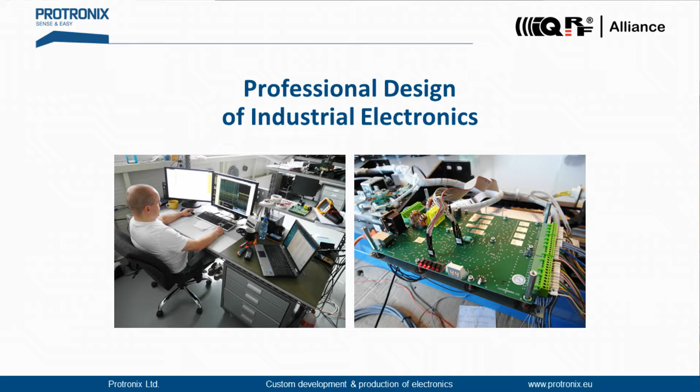So basically our attitude to the customers is that we start from some technical specification, and then through design of the product, through testing and certifications, and in the end, of course, everybody is expecting a successful product. This is our attitude regarding the design. These are just some pictures of design, and this is our EMC laboratory for electromagnetic testing. We are able to test our products or custom-made products in our laboratory.

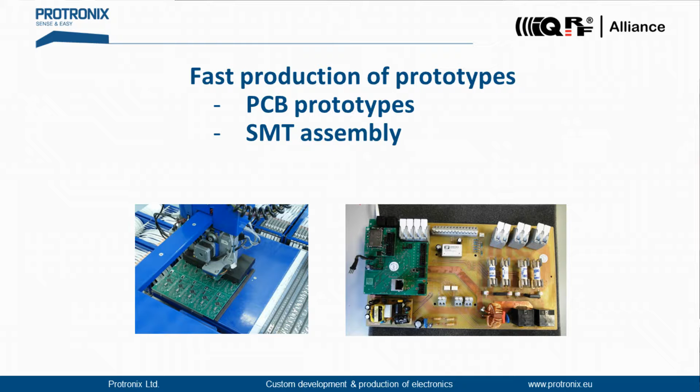And as I have already mentioned, I would like to pay more attention to indoor air quality problems. We're producing different types of sensors. It's CO2 sensors, volatile organic compound sensors. I will explain a little bit in more detail. Then we added to our portfolio ambient light sensors and differential pressure sensors.

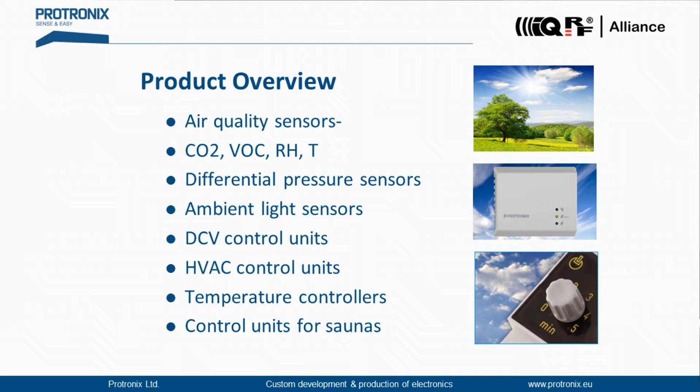So why indoor air quality sensing at all? Because on average we inhale about 15 kilograms of air per day. I think it's a lot. And almost 80% of time we spend indoors on average. When I was thinking about this, I realized that during the summertime and the wintertime I spent almost 100% of time indoors.

In the morning I take my car and go to my office. Then I'm in my office till the afternoon, till the evening. Then I take my car and go home. I realized, oh my God, it's horrible to spend almost 100% of time indoors. So the quality of indoor air is very, very important, I guess. And maybe you have heard about SBS. It means sick building syndrome, a name for problems with the health of people staying a longer time in buildings.

So what are the typical indoor contaminants? These are the so-called VOCs, volatile organic compounds, which are organic gaseous compounds in the air, and they have different types of sources. Then sometimes humidity is too high or too low, or carbon dioxide or carbon monoxide.

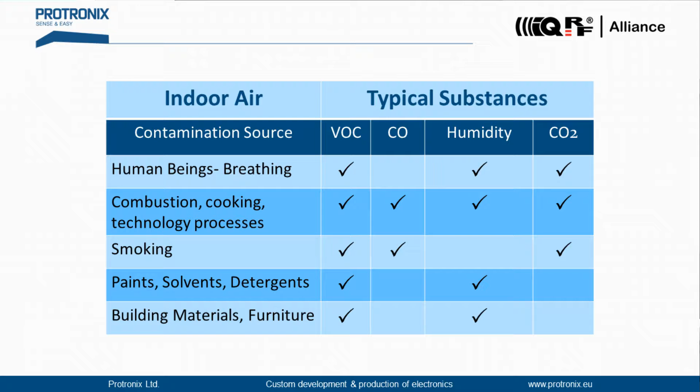This is the table with typical sources of contamination in buildings. Usually it's human-based, human body breathing, or animals. And this table shows the main generation sources of VOCs. There are up to 10,000 different types of VOCs, organic compounds. Then it's combustion, cooking, some industrial technology, etc. Of course, smoking. Then painting, carpets, furniture. Everything emits some chemicals.

And maybe you know if you have a brand new house or brand new office, there's this strange smell, and this is the VOC, which is the basic reason we have to use ventilation and exchange the air.

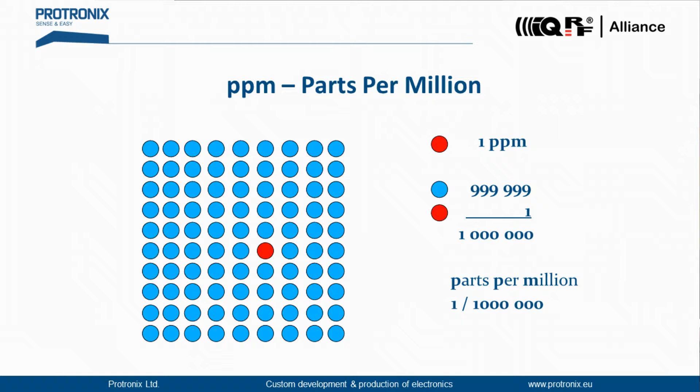The contamination of indoor air is usually measured in so-called ppm. It's an acronym from English, parts per million. It's similar to percent, like percento from Italian. This is a graph where you can see one red molecule and 999,999 molecules of air, so 1 ppm is one red molecule in 1 million molecules of air.

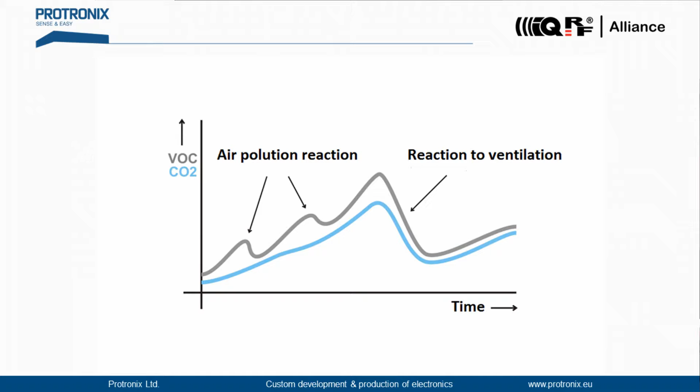And why do we use CO2 to judge indoor air quality? Because as soon as the CO2 goes up, at the same time other organic compounds go up, like those volatile organic compounds. Basically, the reason we ventilate the indoor room is because the concentration of volatile organic compounds is going up and up. So we use CO2 as a yardstick for judging the actual indoor air quality.

Basically, CO2 alone is not so harmful, but in connection with VOC, it's a very good yardstick to control the ventilation system. So the basic purpose of monitoring CO2 is to control ventilation in the best and most efficient way, to save energy for conditioning and heating the air, and of course to save money while at the same time increasing the comfort of the people staying indoors.

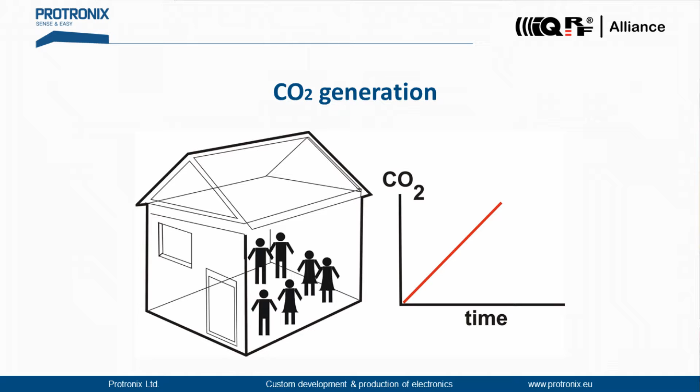As you already know, there's a common trend to increase the thermal insulation of buildings and build in new, better windows which are more tight, and the whole house becomes a very closed thing, like, let's say, a submarine, and without ventilation it's a big problem to live or stay there and be healthy. So if there are a few people inside, the CO2 goes slowly up over time. In the case there are more people, the rate of change of CO2 concentration is much faster, so then it's necessary to start ventilation and control the ventilation system according to the actual concentration of CO2, or better, VOC.

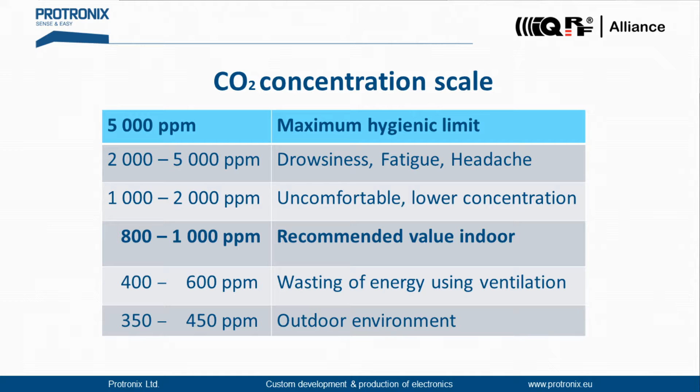Regarding common levels, CO2 concentration outside is on average about 400 ppm. Sorry to say, but every year it's going a little bit up, and a recommended value inside is about 1000 ppm. Below this is, let's say, a waste of energy and money for ventilation, cooling, conditioning or heating the air. And if the concentration goes up and up, there will be a problem with the feelings and comfort of the people indoors. A reasonable maximum limit is about 5,000 ppm. At that limit, it's starting to be a little bit dangerous for the health of the human body.

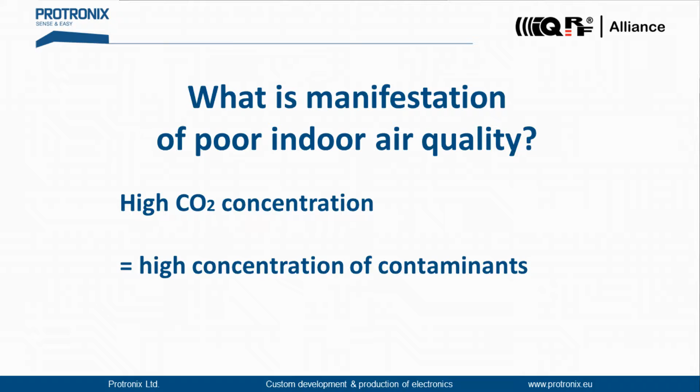Now I would like to tell you briefly some manifestations of poor indoor air quality. Maybe every one of us has some bad experience with poor quality. My colleague from TECO noticed that in the morning about 10 a.m. there was some strange, not so good air, and I didn't see any sensor in this building. So the ventilation system is running according to some timer or manual control, I don't know. So the quality of the air in this room is going up and down, and maybe some of you felt it too.

So what are the manifestations? Maybe you know it: lower ability to concentrate on your work, or paperwork especially. Maybe low efficiency of meetings. One day I was in a meeting at our customer, a big producer of ventilation systems, in a meeting room inside the building with no windows. The ventilation system was there, but not working properly. We measured the CO2 concentration after 2 hours with about 8 people, and it was above 7,000 ppm. It was a really horrible feeling, nobody was willing to stay longer in this room, a very high concentration of CO2 and of course other contaminants.

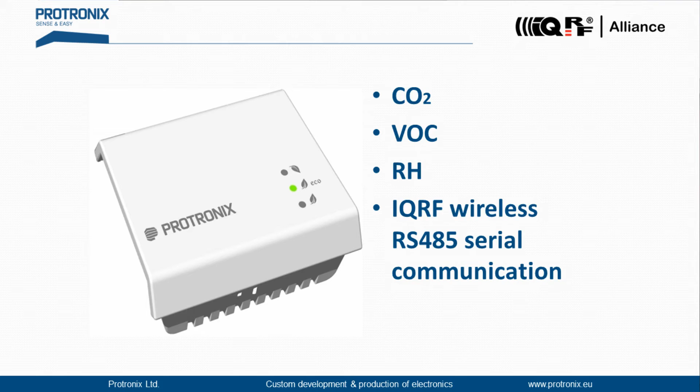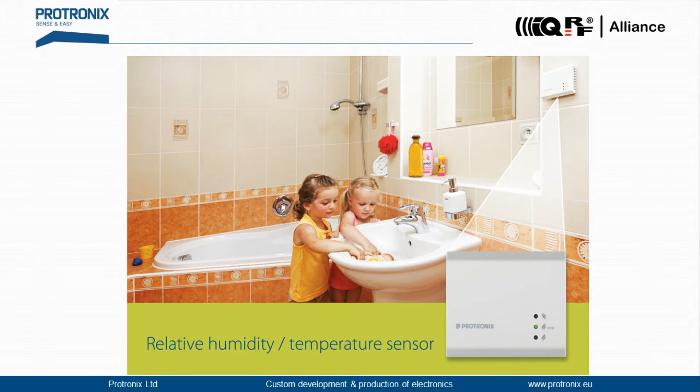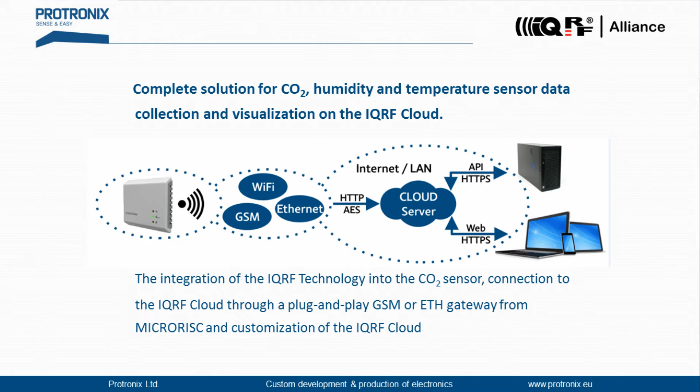A typical use of our sensors is, let's say, the CO2 sensor in the living room, the VOC sensor in the kitchen or dining room, and the relative humidity sensor in bathrooms. And as was mentioned by my predecessors, our sensors can be integrated through some gateway to the cloud, with visualization of the data from the sensors. So we are, let's say, at the bottom of IoT, the first line, to sense, to perceive the data, and then it's possible to transfer the data, manage them, visualize them, etc.

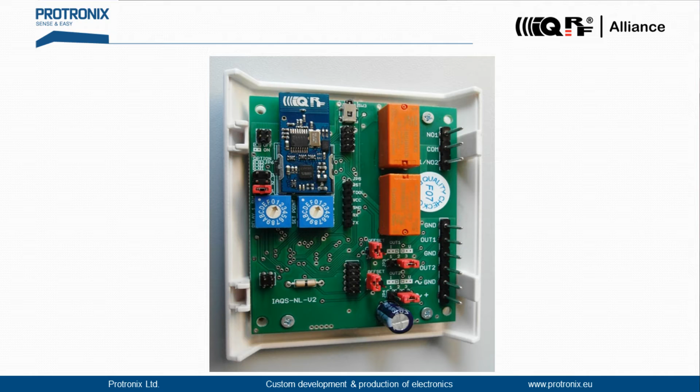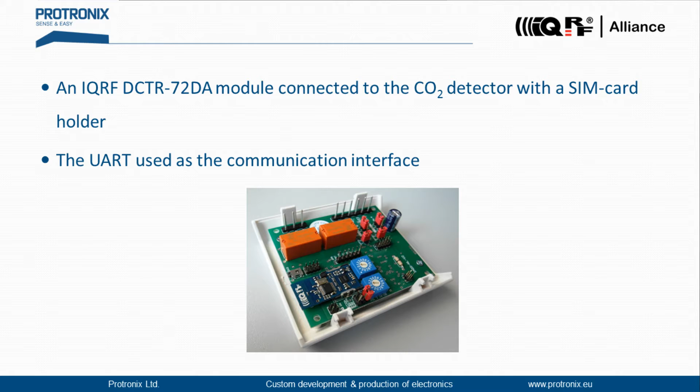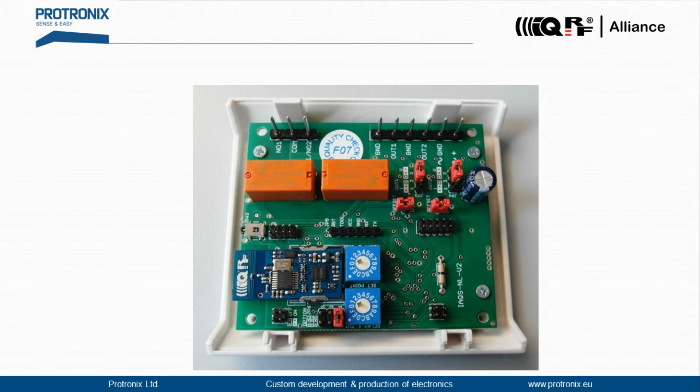This is the hardware inside of our sensor, and we have added to our communication protocol a new feature: we have two relays built into the sensor, and you can remotely control these relays to turn them on or off independently of the actual value measured by the sensor. So it's like a small expansion board with two relays, so you can read the actual value of, let's say, CO2 and at the same time control something from your application using our two relays.

You saw here the integration of, I'm sorry, an older one, but without any problem it's possible to exchange it with the red one, the new IQRF module. I guess the 72 is okay. It's correct. So, yeah.

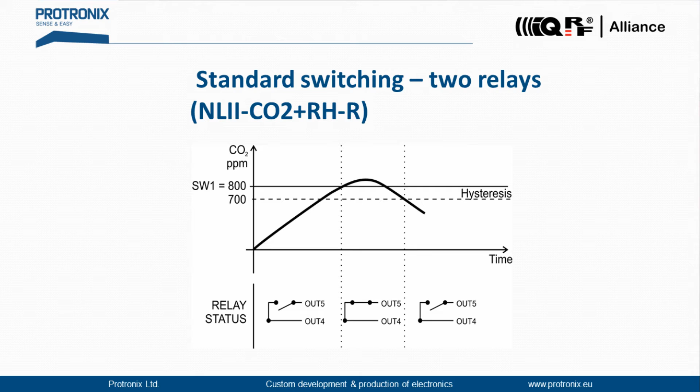So this is a picture of how it's working. The relays, there are two contacts, one relay, second relay, and it's possible to remotely preset them, to set the trigger level, or control the relay outputs totally independently of the actual quantity the sensor measures. These are some graphs; we cooperate with the CIS company, which made for us some visualization of our data. So just an example of it.

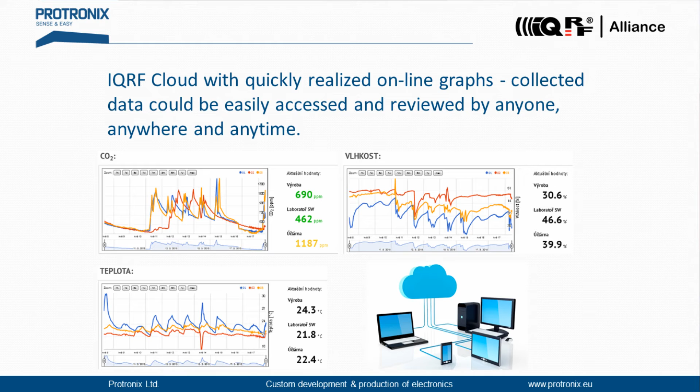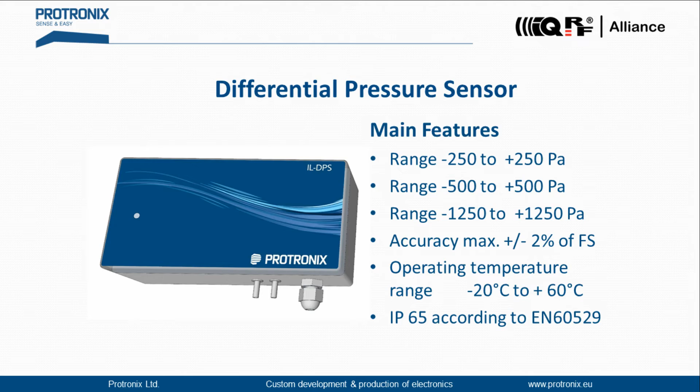And now I very briefly introduce you to our new sensors, which are suited for industrial purposes. The first one is a differential pressure sensor. It's built in this plastic box, which has a very high ingress protection, IP65, so you can place it almost anywhere. There are different ranges of differential pressure, and the operating temperature is from -20 to +60 degrees Celsius. It is suitable for applications in industry. The first one, let's say, is monitoring the airflow in ventilation ducts.

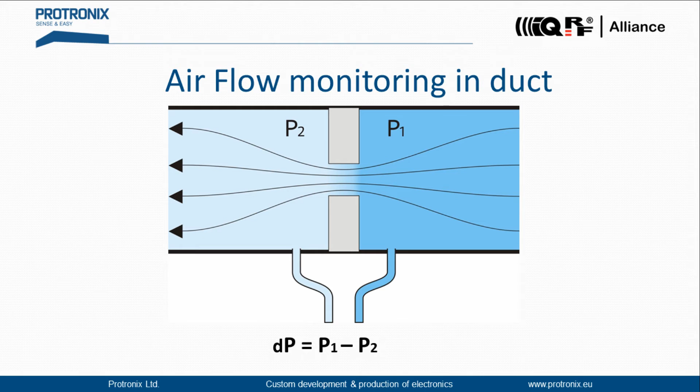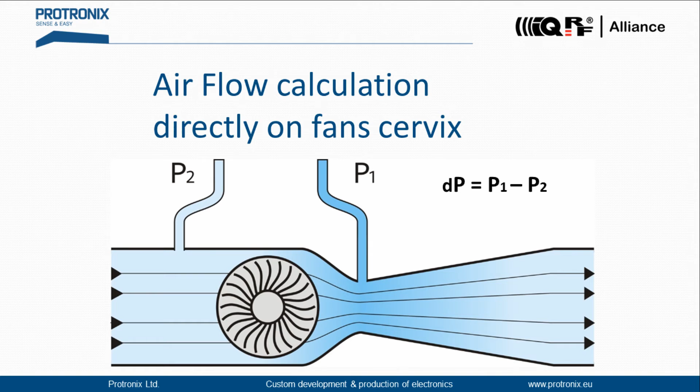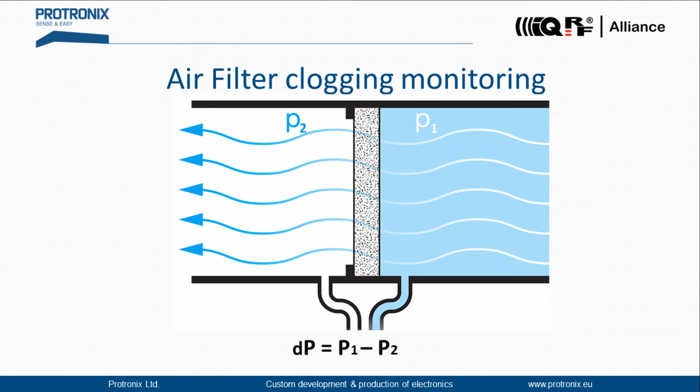The second thing is to measure differential pressure directly on the fan, and then it's possible to calculate the actual flow generated by the fan. Or it's possible to use it to monitor the filters in the ventilation system, to check if there's some clogging of the filter, and then to indicate to a serviceman or send a message that an exchange of the filter or filters in the ventilation system is necessary.

Another use is in so-called clean rooms, where you need to keep overpressure inside to prevent the air from outside going into the clean room. We have an application in pharmacy. They were packaging pills, and they have to prevent the outdoor air or air from the corridor in the building getting inside, so it's necessary to measure the overpressure in this clean room and to control the ventilation system properly to keep overpressure in this clean room.

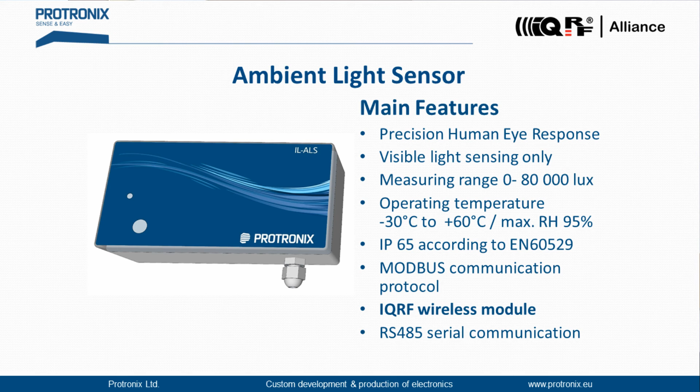Another industrial sensor is the ambient light sensor, which is again in the same box, and it has IP65 ingress protection, so it's possible to use it outside. It measures the ambient light illuminance in lux from 0 to 80,000 lux, and its sensitivity is very close to the human eye. And of course, we use the IQRF communication module in those sensors, so it's very easy to implement: as soon as you handle the communication with one of our sensors, it's no problem to start using another sensor, just to read a different value from the sensor, that's all.